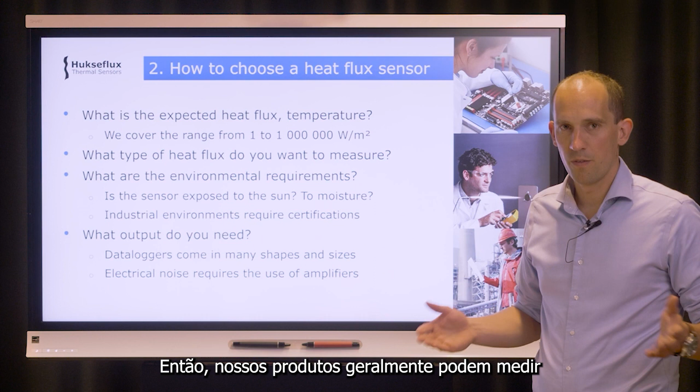When you have an application where you want to measure heat flux, the first thing you should ask yourself is what are the typical expected heat flux and temperature ranges. That's important because our products can measure single watts per square meter of energy, and they go up to 1 million watts per meter squared. Then of course, what is the type of heat flux - is it conduction, radiation, convection, or a combination of all three?

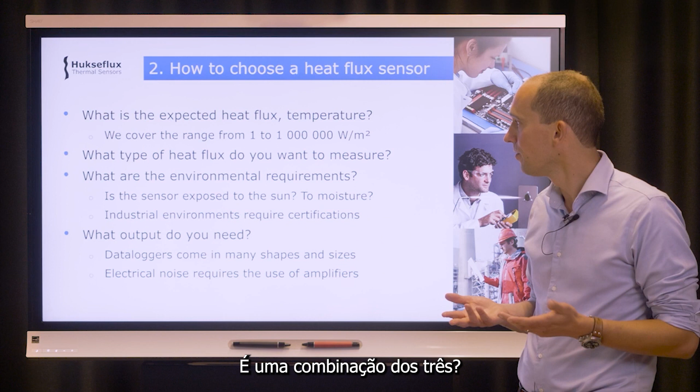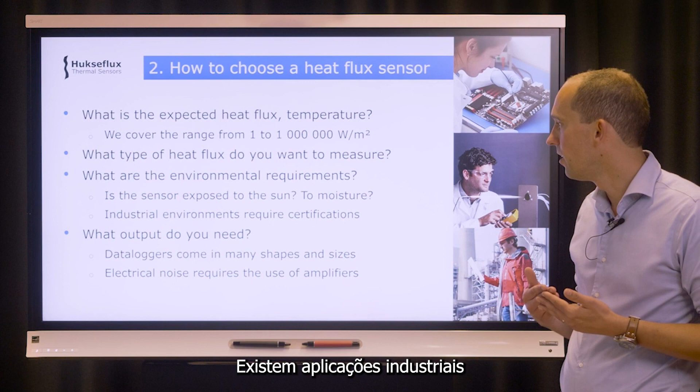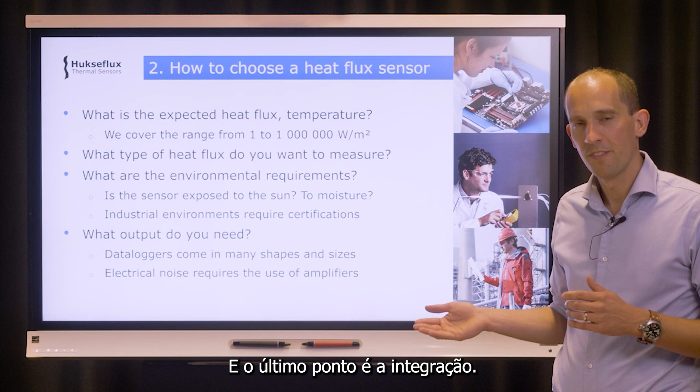The third question you should ask yourself is what are the environmental requirements? Where am I going to be using this sensor? Is it outdoor, indoor? Is it in a moist condition? Is there any industrial applications like chemical, pressure? The final point is integration - what kind of output do you need? Heat flux sensors generally output a small millivolt signal, which you will need to transfer into a system that's usable by your data acquisition.

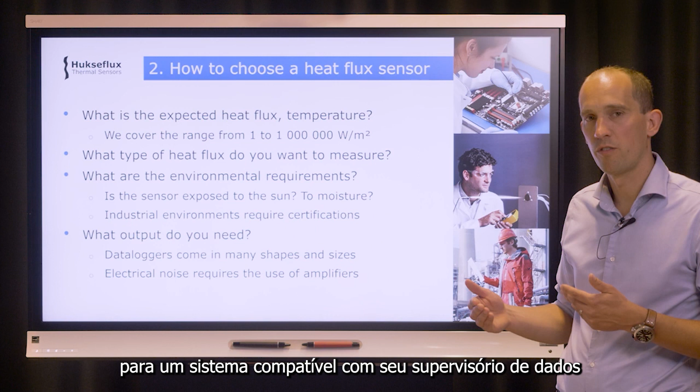Okay, so I will go through the Hukseflux product line to explain what different heat flux sensors we offer and in which case what they are used for.

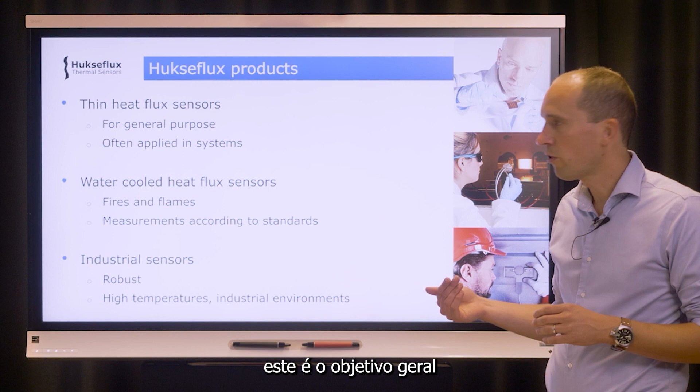So our heat flux sensors are basically separated into three main categories. The first one is thin heat flux sensors. These are the very general purpose heat flux sensors - you can just take them, they're very small, you put them anywhere you want. They're also often applied in systems combined with other measurements.

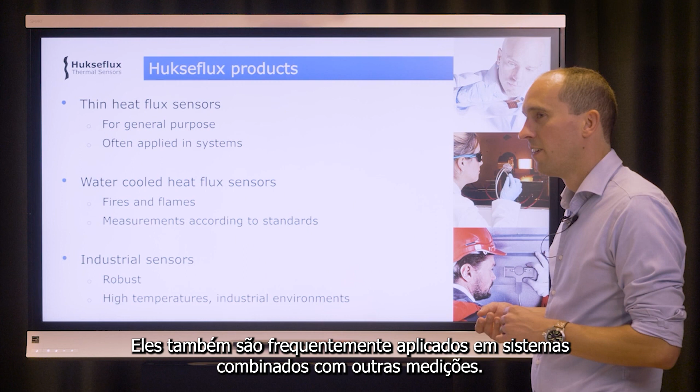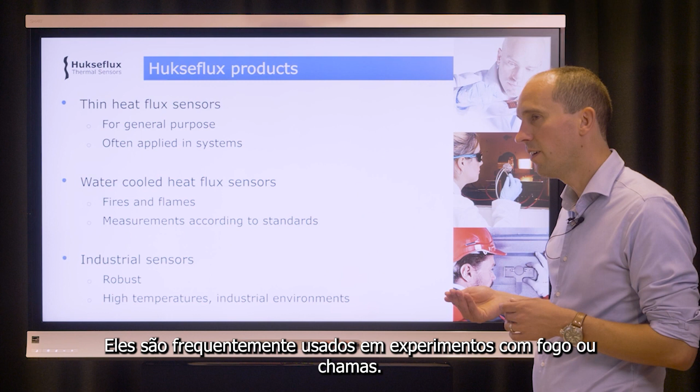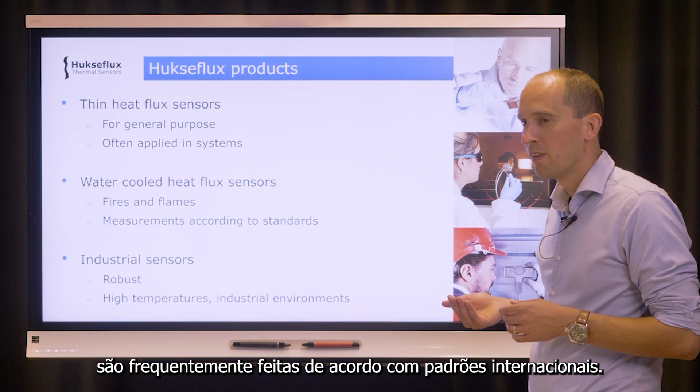The second class of heat flux sensors is what we call water-cooled heat flux sensors. These sensors are used to measure radiative heat flux, often used in experiments with fires and flames. In those kind of situations, measurements are often done according to international standards - a very strict protocol of how many sensors you should use, which one you need. It's a very standardized measuring world.

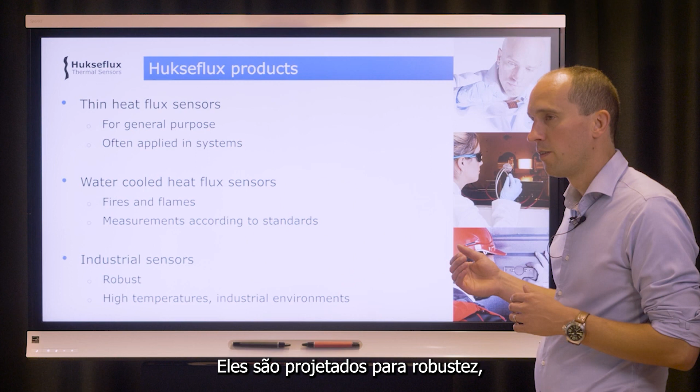Our third range of heat flux sensors is what is called the industrial sensors. They are designed for robustness, to survive in conditions with high temperatures, or conditions where you work in explosive environments, for example.

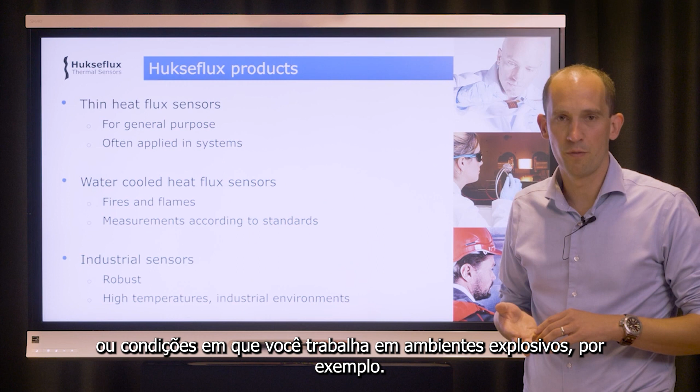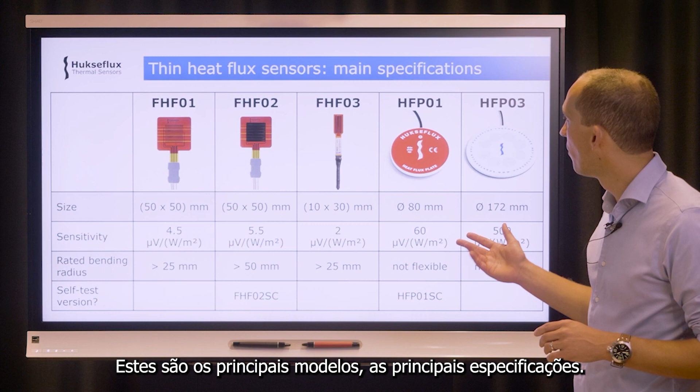So I'll zoom in on these different categories. Let's start with the thin heat flux sensors - these are the main models, the main specifications. You have FHF 01, 02 and 03, and those are already recent models. Then the HFP 01, HFP 03, which have been in our catalogus for a long time.

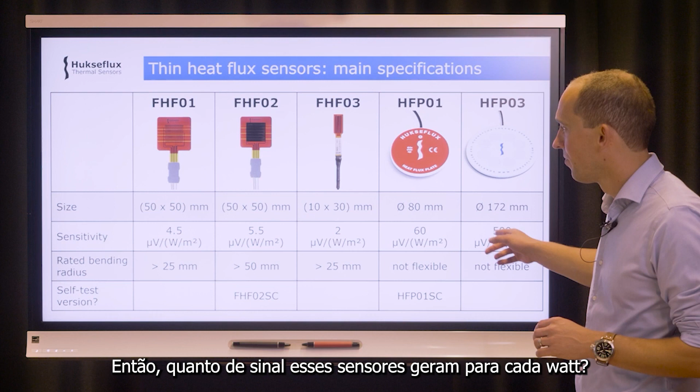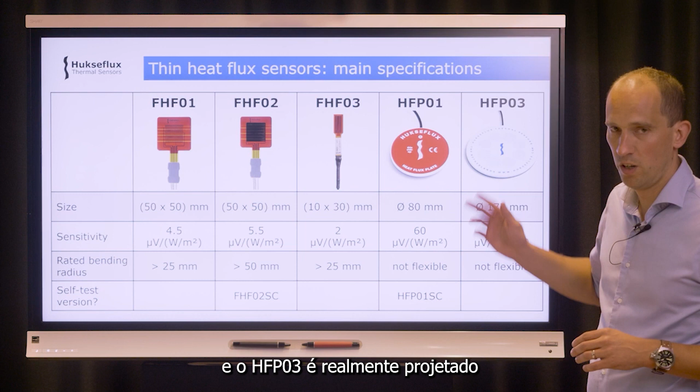So you see they come in different sizes. The FHF 03 is the smallest one, HFP 03 becomes rather large. The sensitivity - how much volt do these instruments generate for a single watt per square meter - varies widely. You see these basically range from 2 to 6 microvolts per watt per square meter. The HFP 01 has a value of 60, and the HFP 03 is really designed for a very high sensitivity.

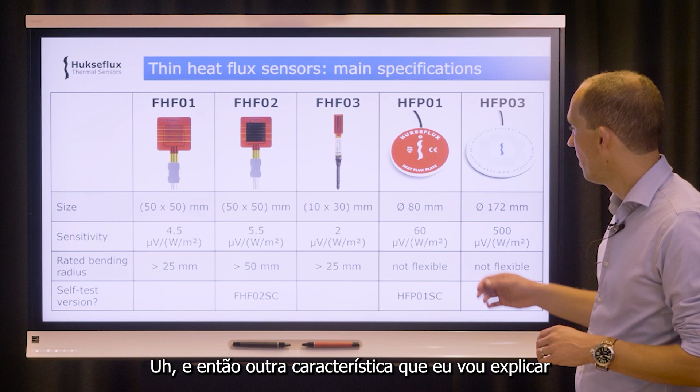Now these are fixed, rigid instruments. The plastic-based FHF models have some bendability, so they're slightly flexible - they can be bent. And then another feature, which I will explain a little bit later, is in the FHF 02 and in the HFP 01, there is a self-test version available.

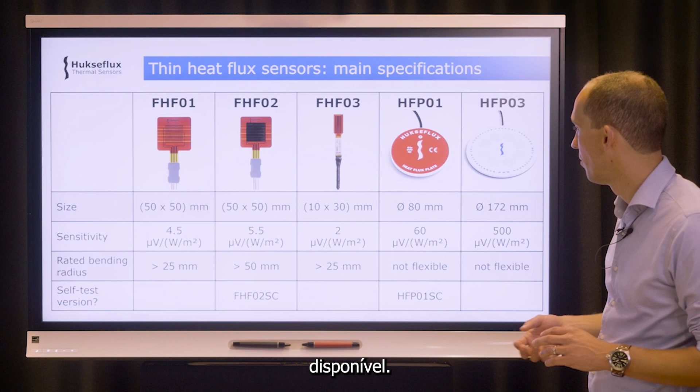So the story we tell when we talk about our heat flux sensor range is we have this FHF 03, which we consider a step-in model. It's very small, it's affordable - if you've never worked with heat flux before, it's a great instrument to start with. The standard model we like to sell is the FHF 02 - it has everything you need from a heat flux sensor, it packs all the features. The FHF 01 is basically only to be used when the extra flexibility is required, because it's slightly more flexible than the FHF 02.

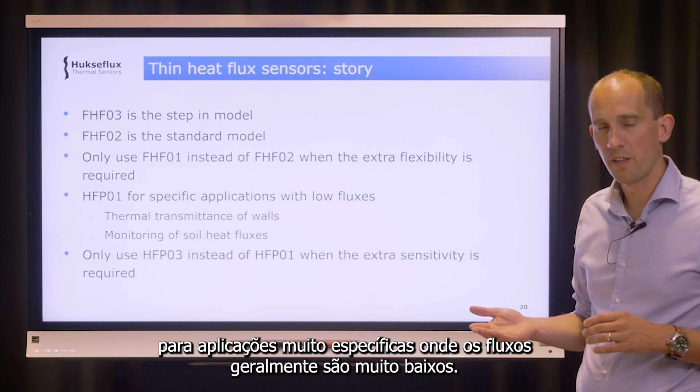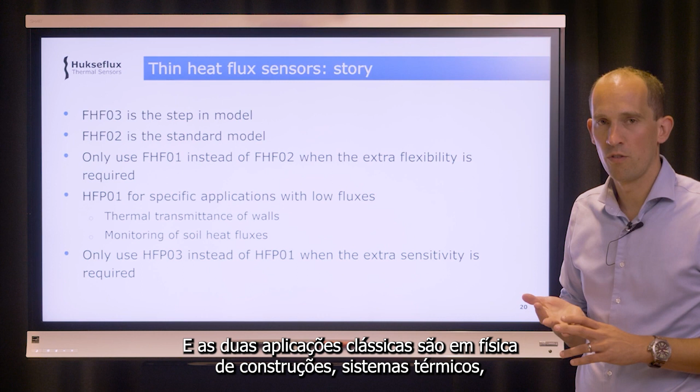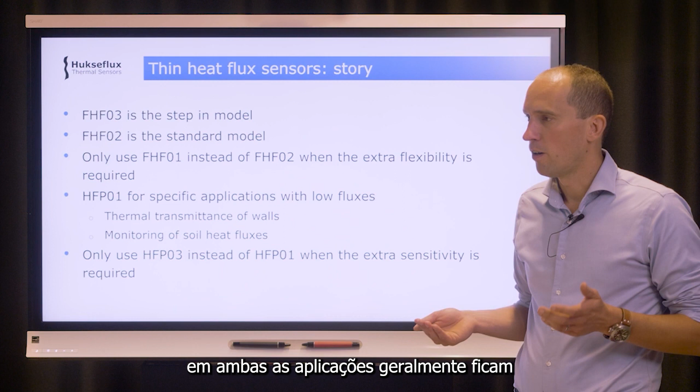Now these heat flux plates, the HFP 01s, are used for very specific applications where the fluxes are generally very low. If you have low heat flux, that means the voltage output will also be low, and sometimes the sensitivity of the FHF range is not sufficient. The two classical applications are in building physics, thermal transmittance of walls, and in soil heat fluxes, where heat fluxes in both applications generally range like 5, 10, sometimes 20 watts per square meter.

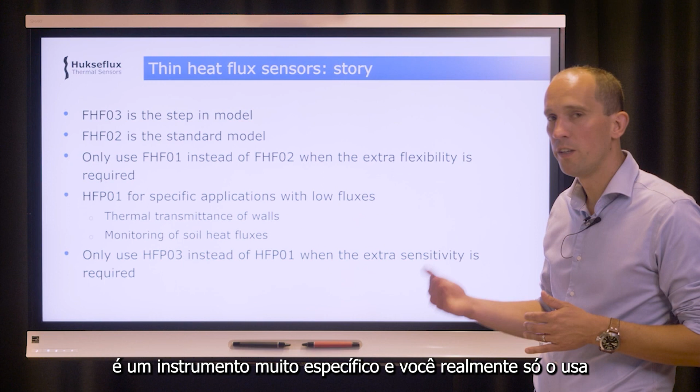The HFP03 is a very specific instrument, and you really only use that if even the HFP01 is not giving you enough sensitivity.

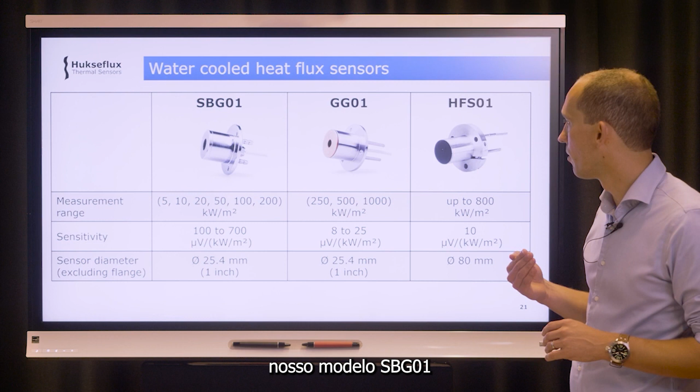Okay, let's go to the water-cooled heat flux sensors. Basically, we run 3 different models: our SBG01 model and our GG01 model, which look very similar. You see the GG01 is based on a copper body.

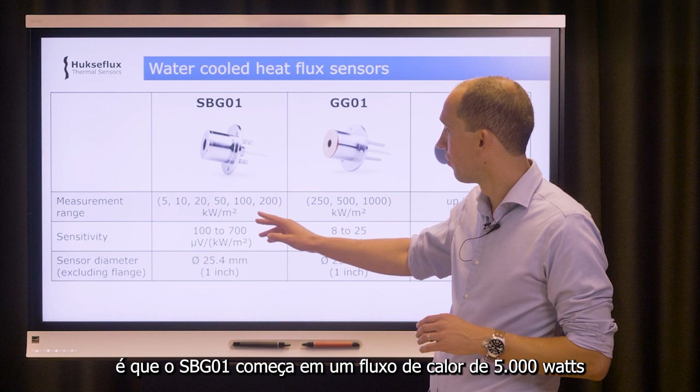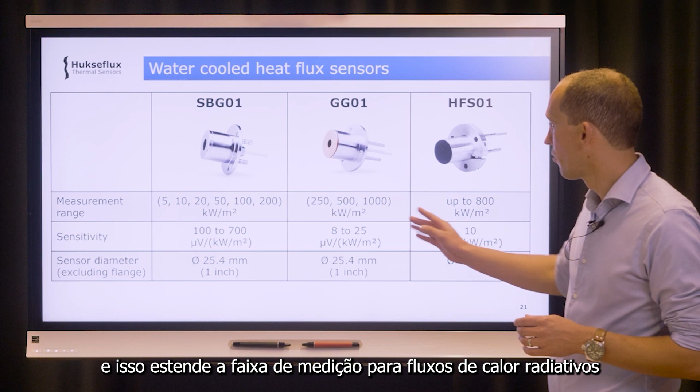The difference between these instruments is the SBG01 starts at heat fluxes of 5,000 watts per square meter up to 200,000 watts per square meter. Where that range ends, the Gardon gauge range begins, and that extends the measurement range for radiative heat fluxes up to 1,000,000 watts per square meter.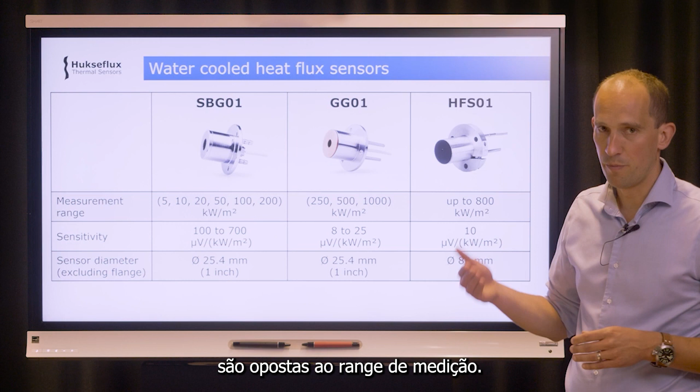These sensors are standardized at 1 sensor diameter, like a 1-inch diameter. And of course the sensitivity scales in the opposite direction with the measurement range, so the higher the measurement range, the lower the sensitivity becomes.

The third model of a water-cooled heat flux sensor is the HFS01. That also extends up to 800 kilowatts per square meter. But this one is completely metal, and all the parts in this sensor instrument are able to withstand temperatures of up to 900 degrees Celsius.

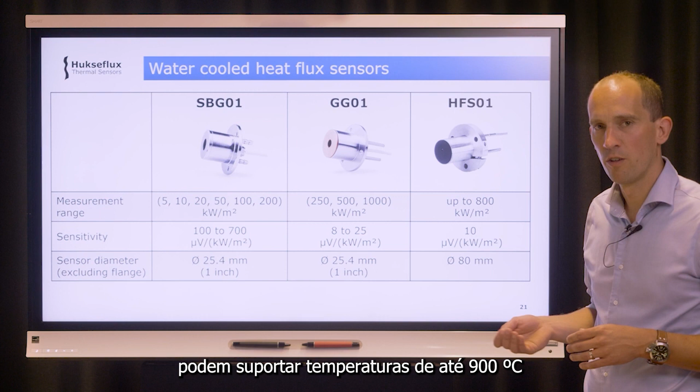So this one is used in very industrial heavy applications like solar concentrators. The SBG01 and GG01 are more laboratory-based instruments.

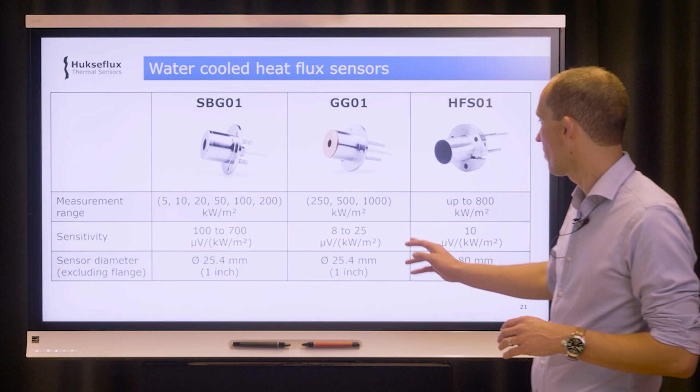So again, to summarize in a story, the SBG01 is the main model, widely used in many standard experiments all over the world.

GG01s are designed for extremely high fluxes. They extend the measurement range. They come with a standard thermocouple, and they also have an option of a sapphire window, which allows you to separate radiation and convection again.

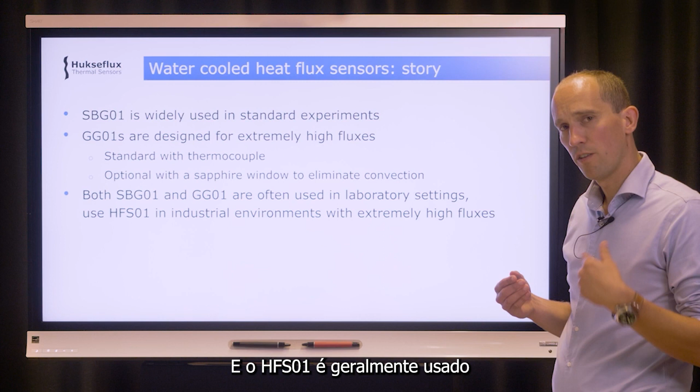And the HFS01 is generally used when you go out of the laboratory into industrial environments.

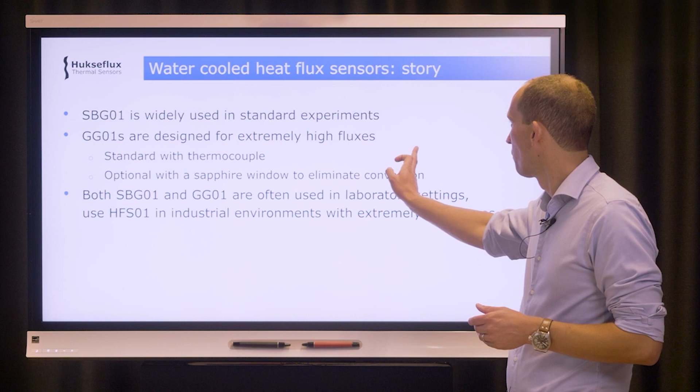So finally, to zoom in on the industrial heat flux sensors, again there's 3 main models: IHF01, IHF02, and HF05. The first 2 have a temperature range of -30 to +900 degrees Celsius.

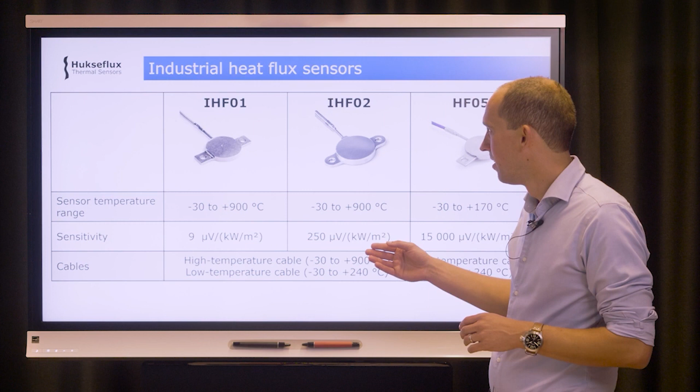So they are industrial in the sense that they are completely full metal instruments. There is no glues, no soldering connections. The detector technology is very robust.

The IHF01 has a very low sensitivity. The 02 has a somewhat higher sensitivity. And both these instruments come standard with 2 cables.

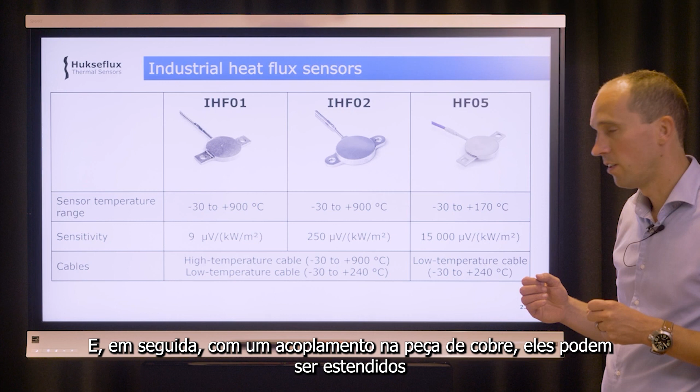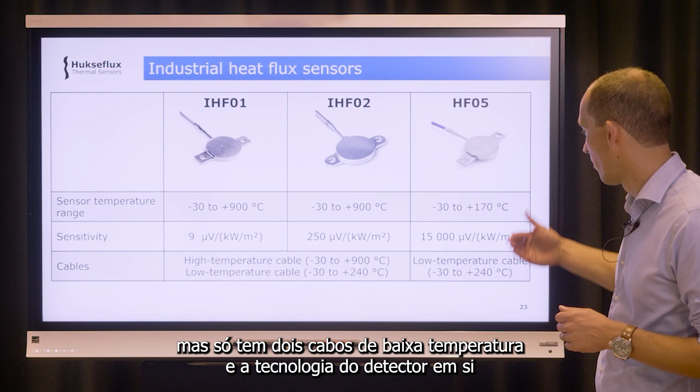They start with a high temperature cable, which is also able to withstand extremely high temperatures. Then, with a coupler piece, they can be extended to low temperature cables. Now the HF05 offers a lot more sensitivity, but it only has the low temperature cable, and the detector technology itself is limited to 170 degrees Celsius.

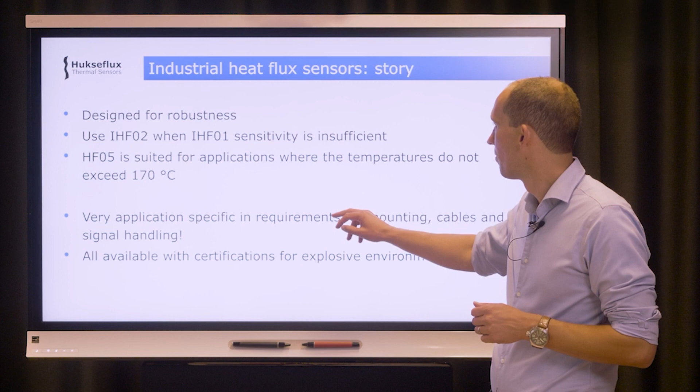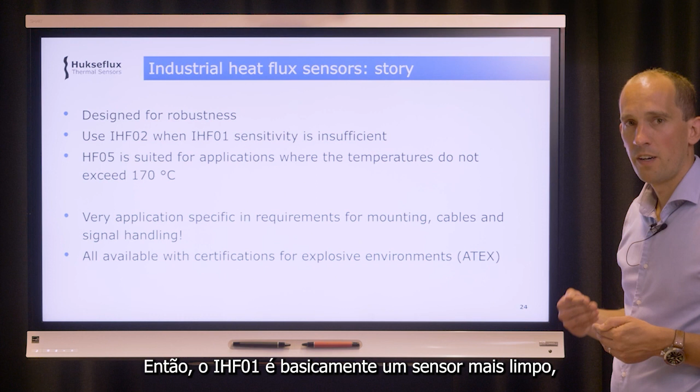So the story of our industrial heat flux sensors is designed for robustness. You use the IHF02 when the IHF01 sensitivity is insufficient. So the IHF01 is basically a cleaner sensor. It offers the most accurate measurement, but you lose a lot of sensitivity.

HF05 is only suited for applications where the temperatures do not reach these high values of more than 170 degrees.

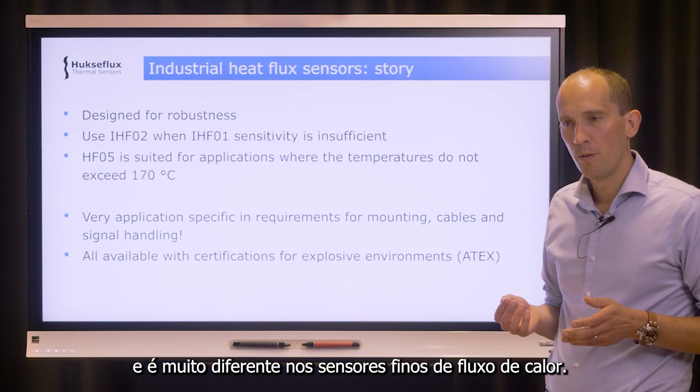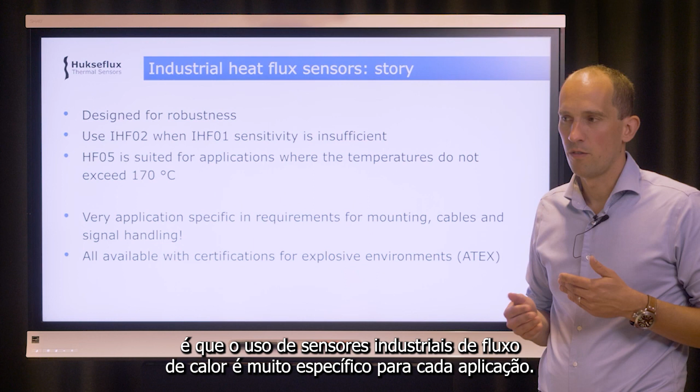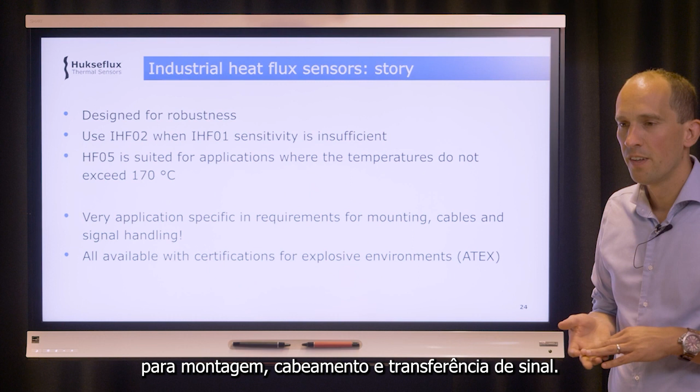Now, industrial heat flux sensors is a very complex environment, and it's very different from thin heat flux sensors, and these are not general purpose sensors. So what we find is that the use of industrial heat flux sensors is very application specific. Every customer will have different requirements for mounting, cabling, signal handling. So there is a lot of option and customization that comes with selling an industrial heat flux sensor.